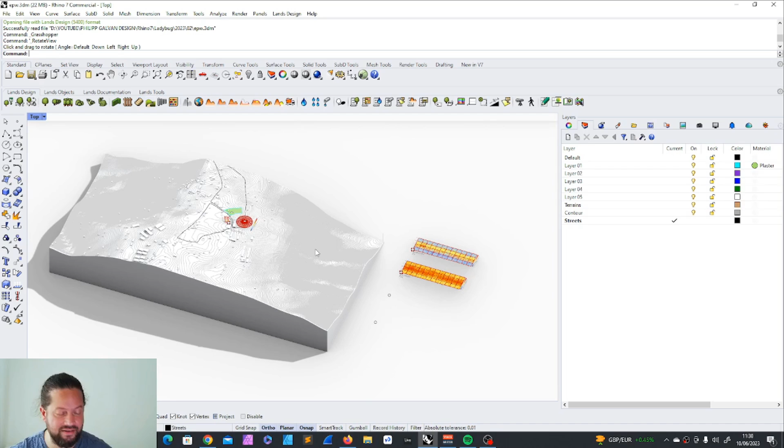If you don't have a problem, then there's a problem. If you try to fix a problem, you automatically have a goal. If you can find the problem, then you automatically have a goal, and that's important to any design you do. If there's no problem, then you haven't done your analysis well, I think.

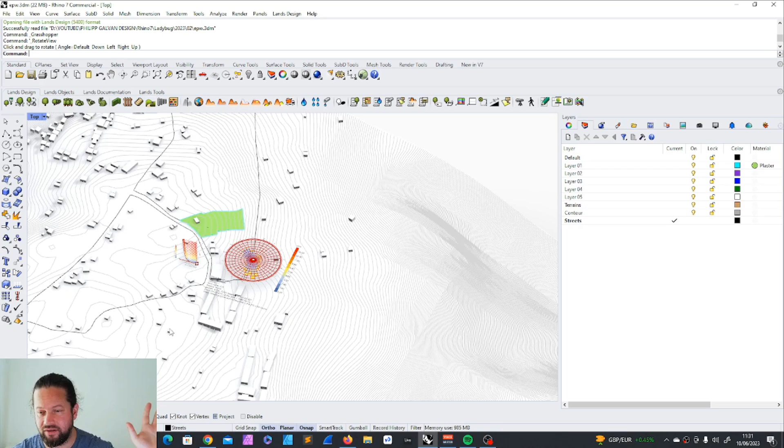If you don't know anything about what we did in the previous videos, please go back in the videos. It's kind of crucial to understand where we are. I'm working on a real project. It's on a slow pace, but I try to really get my head around what's going on inside and what I could contribute in order to work it out. So go back and see what I discussed before, so you understand what it's all about.

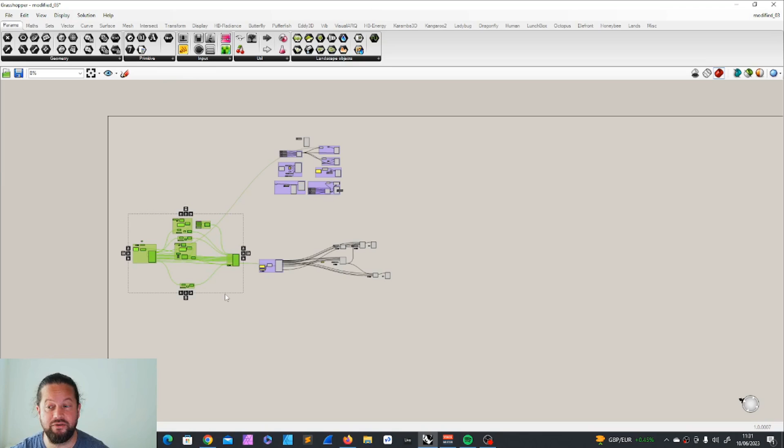In this video, we will have weather data. Maybe I go here into Grasshopper for you to better understand. All right, in Grasshopper, we imported weather data from an online source. Unfortunately, that weather data is not directly at the site where we have our project, so we had to modify the weather data so it fits our project better. It's not ideal, but the purpose is to show you how you could modify your weather data.

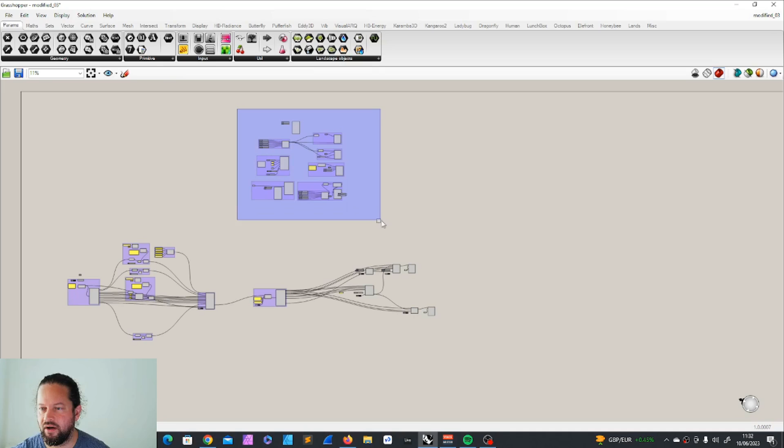So even if you don't want to watch the previous videos on how to modify weather data, you can still use just a generic E+ weather data in order to follow along with these next steps. In the previous videos we also looked into how to import. So if you don't know these first portions, import and analyze data, then I highly recommend you go back in the playlist and watch these videos.

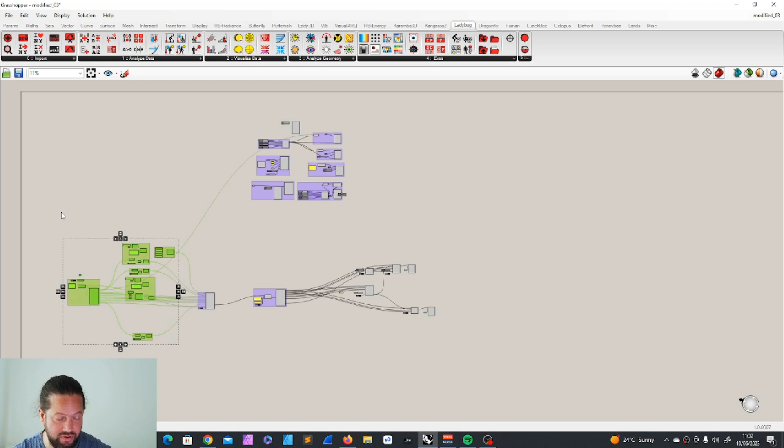Again, this first portion is just us basically trying to manipulate the weather data which came from the airport, from Kigali. The output is just another weather data. So you can use a generic weather data in order to understand the tool. You don't need to follow this whole step. You can plug everything into the import E+ weather data. So this tool here is exactly the same as here. This is just our modified version of the weather data.

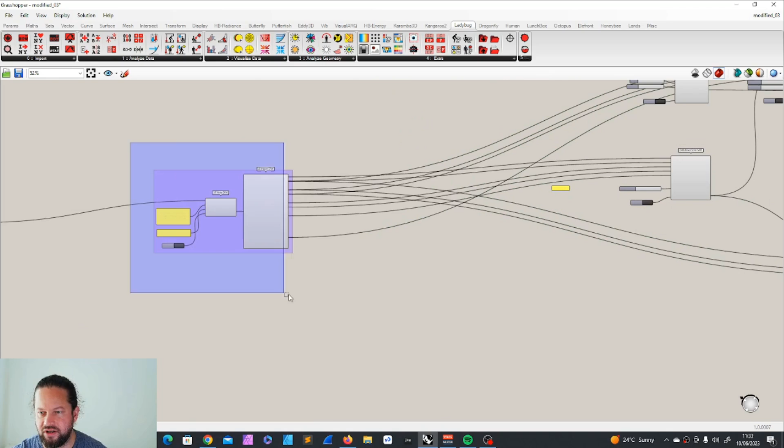And in the last videos, we looked into all kinds of things like how to construct data, how to deconstruct data, how analyze period works, wind speed, degree days, and so on. And then in the last two videos, we looked into the UTCI outdoor comfort and the PET comfort, which are both outdoor-based comfort studies. And it turned out that PET is much more accurate or takes other things into account. So that was very interesting. It also differentiates between male and female. That was very interesting, especially for this project. It will be run by women, and that's why it's very important to get that right, to understand what's going on.

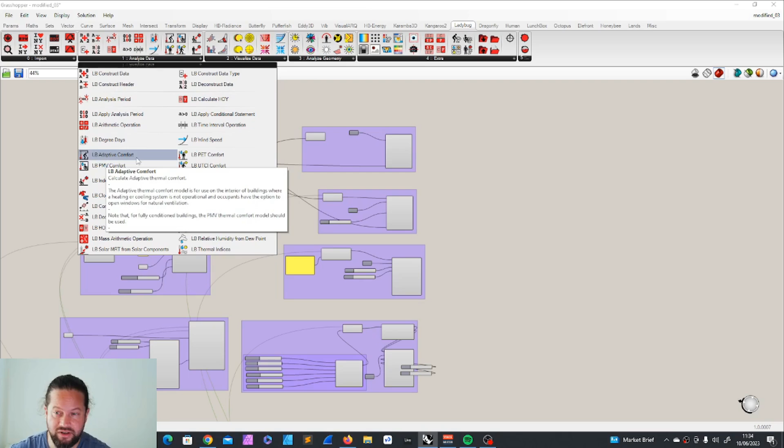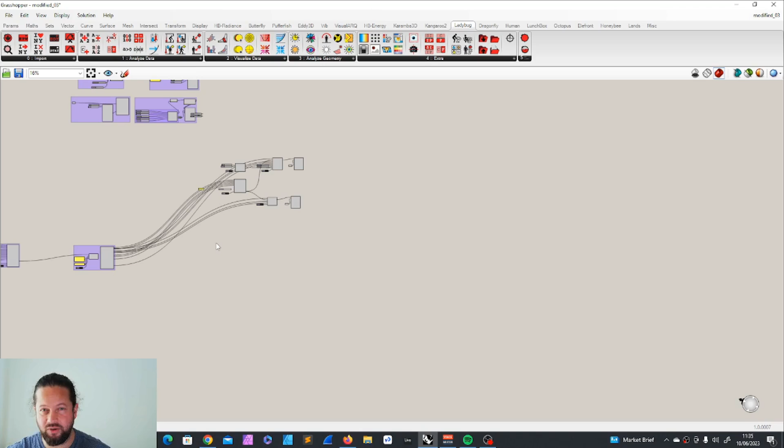So this was outdoor comfort, and now today we look into both these tools, the adaptive comfort and the PMV comfort. They're a bit tricky to apply because it's going to be a mix of generally analyzing the weather data. At the same time, it could be extended quite a lot to where it actually involves the model, but we will not work with a model yet because we don't have a model. So we will just use the data we have at the moment.

Again, this was just us playing with data. This was the transformation of the weather data. This is our weather data now, the transformed weather data. This was the indoor and outdoor comfort. And we plotted these charts showing the different outdoor comfort models.

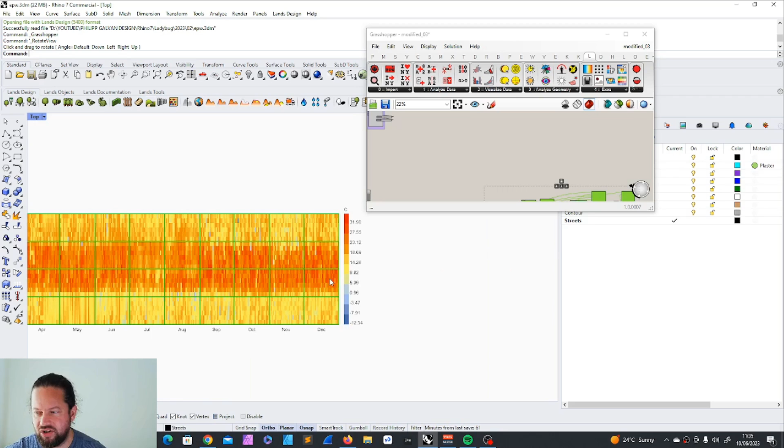The physiological equivalent temperature, which got us a very, very detailed idea on the temperature, on the perceived temperature. And then we had the Universal Thermal Climate Index, which gave us quite a different look, strangely. So it's something I will explore more in future because I got very curious about the physiological equivalent temperature. It seems like it's more refined, more accurate. Okay, nevertheless, indoor comfort. Let's see what we can do.

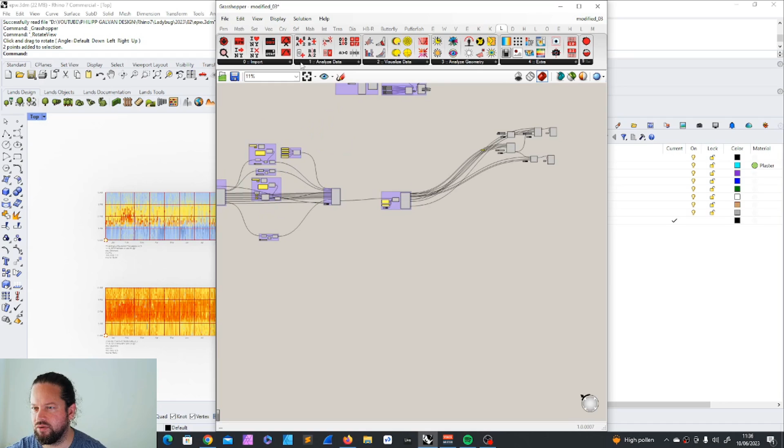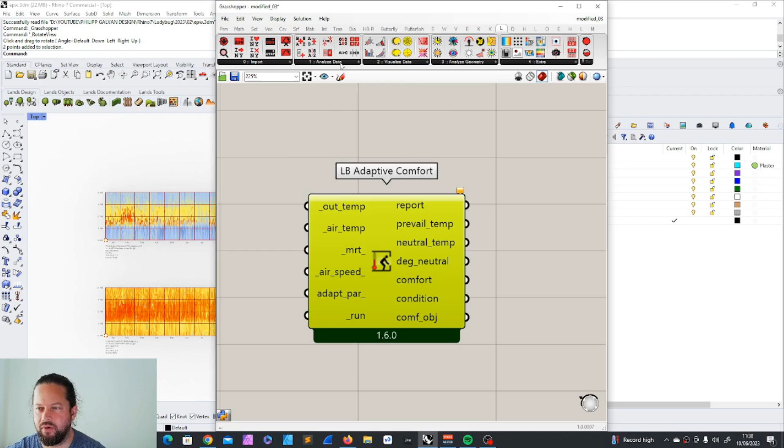Ladybug tools, we are here. We will look into these two. Let's see if we can look at both, or if we need to split up the whole thing again. Ladybug adaptive comfort. This is actually supposed to be the first in the comfort series, but when I tried it the first time, I ran into some problems. All right, just to very quickly summarize, we have two models here. We have the adaptive comfort, and we have the PMV comfort.

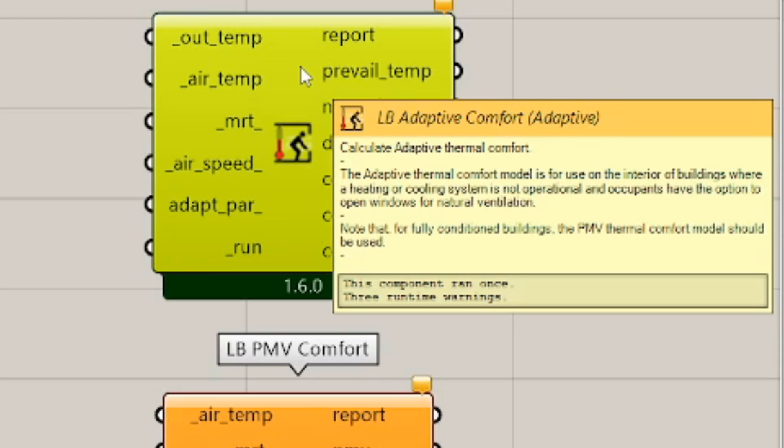Let's open both so we see what the differences are. Maybe we do it just together at the same time because it might help. We have similar inputs, different outputs, different calculation. The adaptive thermal comfort model, as it's defined here, is for use on the interior of buildings where a heating or cooling system is not operational and occupants have the option to open windows for natural ventilation. Note that for fully conditioned buildings, the PMV thermal comfort model should be used.

So this is for buildings which have no heating, no cooling. The PMV model is for buildings which are fully conditioned. As per definition, the PMV is a thermal comfort model for use on the interior of buildings where a heating or cooling system is operational. For naturally ventilated buildings, the adaptive thermal comfort model is recommended, and for outdoor conditions, models such as the Universal Thermal Climate Index UTCI or physiological equivalent temperature are recommended.

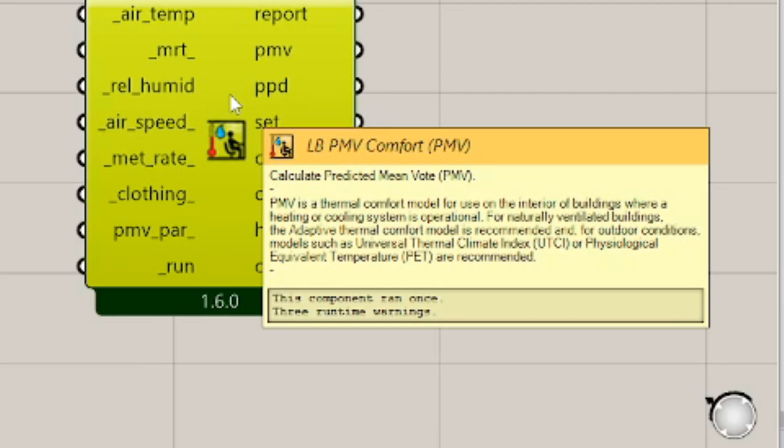So that's what we looked at last time. This is for conditioned buildings. This is for buildings without heating or cooling. We will look at both. All right. So we have the outdoor temperature. The outdoor temperature we know. We have the dry bulb temperature. And because it's indoor, it's all about the air temperature around the occupant.

Now, because we don't know anything about the space yet, we don't know the building, the structure, the materials, we have to make certain assumptions. Let's say we have no heating or cooling in the building. The next best data we have for the air temperature is actually the outdoor temperature itself. Sounds a bit weird, but that's the only thing we have at the moment.

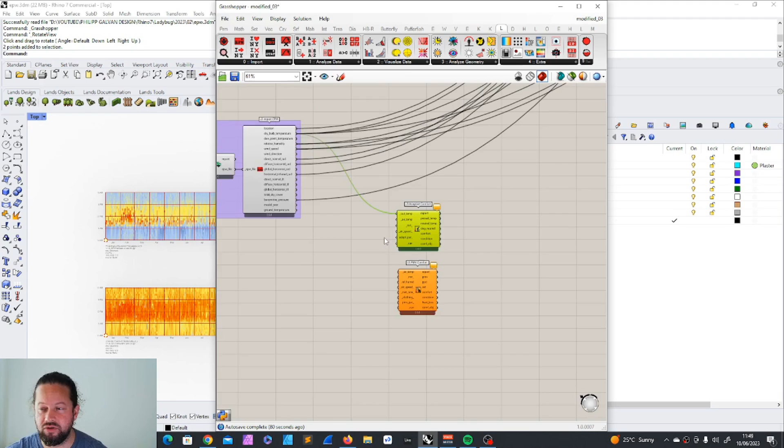But keep in mind that if you research more on how the temperature changes from outdoor to indoor through heat gain, solar radiation, and how the occupants change the temperature, because people working in a space also change the temperature inside, then you can start to make adjustments. For now, just to show you the tool, I will use the same temperature as the outdoor temperature. As a starting point, I think it's reasonable, but again, use it with caution.

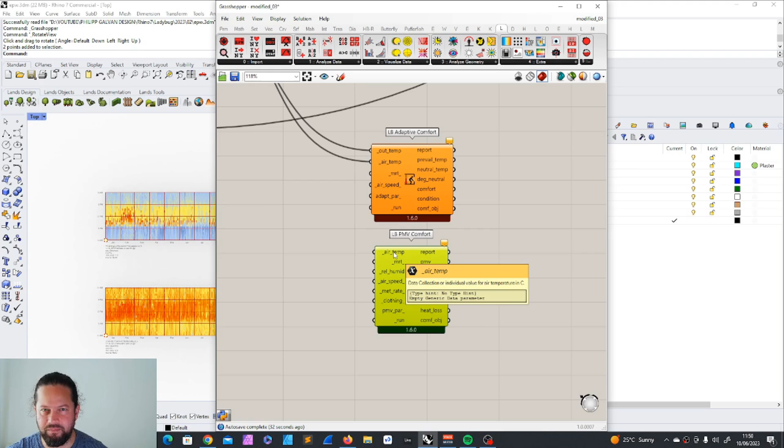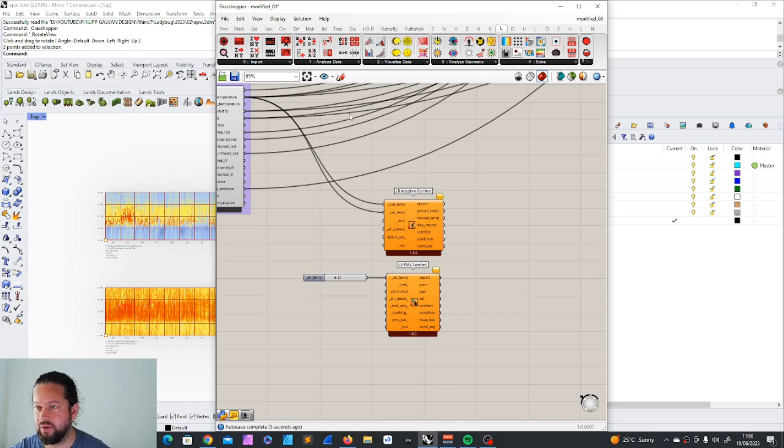And then we have the air temperature for conditioned spaces. We would need to assume that the air conditioning always tries to keep a range between 19 and 23 degrees or something like that. So we just have a slider here and we will provide the air temperature. We also need a run button, Boolean toggle, copy. These are actually the two things we need to add. There's nothing more to add here.

Now we already can check and see the comfort. Again, it's a bit tedious because we don't have the air temperature, but you can play with that. We could also research a bit how a building with certain insulation, shading, self-shading might influence the outdoor temperature so it fits an interior environment.

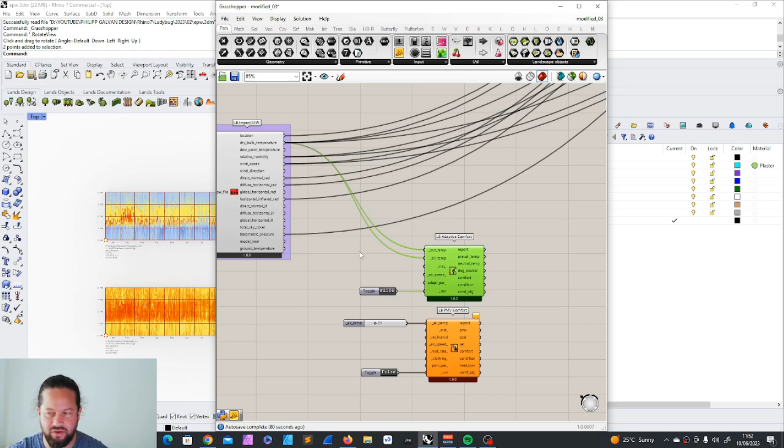So for example, today here it's pretty warm. I can imagine if I go outside in the sunlight, it must be much hotter than here, and in the shade it's probably cooler because I have a breeze. Maybe the temperature might be 3 degrees different. It's tricky because temperatures in winter might be warmer inside and so on. So that's why I will just stay with the outdoor temperature. I assume that people open their windows, so it's always pretty much similar to outdoor. These are the items we need to provide in order to run it. We don't need anything else.

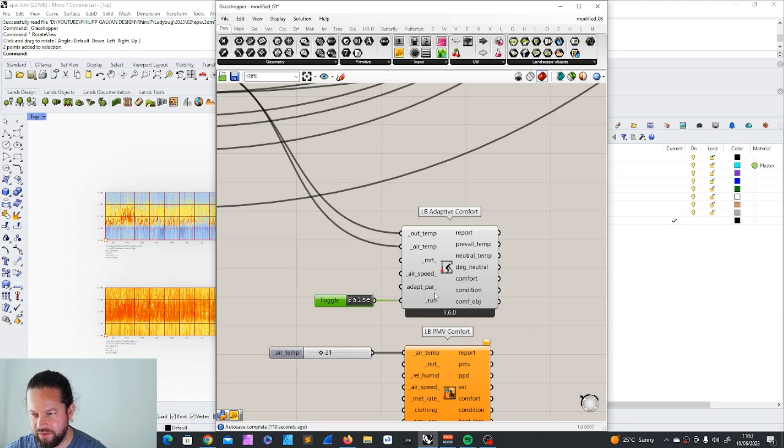However, you have optional inputs. So the mean radiant temperature, what is it? I think we looked at this before. Oh, we had the met rate actually here. Okay, again, outdoor temperature, air temperature. Air temperature represents the temperature inside. Because this is a building without cooling or heating, it's probably very similar to the outdoor temperature. It's tricky to assume, but we don't have any other data at the moment. We have an option called mean radiant temperature, which we will look at in a second. We also have airspeed, and some adaptive parameters.

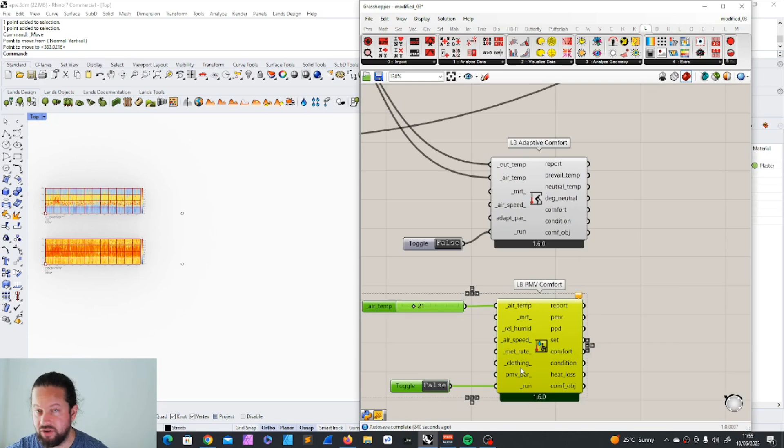And then we look into the PMV comfort. Here it's also a bit different. You also have the mean radiant temperature, relative humidity, airspeed, the met rate. We talked about met rate in the last video. Clothing, PMV parameters. So let's go through step by step. Here again, we don't need anything else to plot something out. What could we look at?

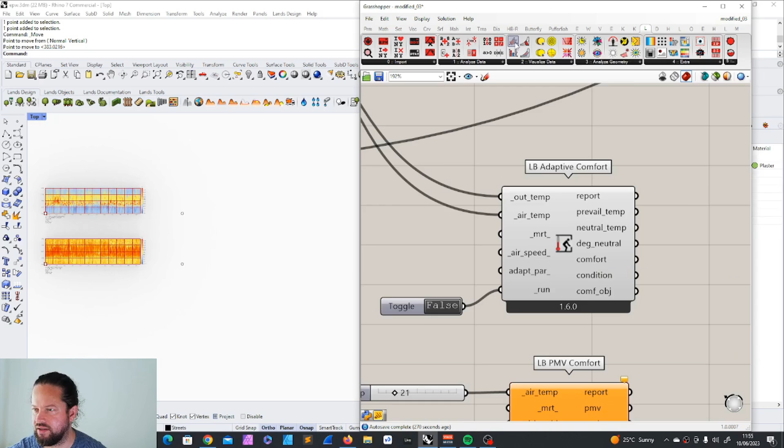We look at if it's comfortable or not. We just grab another chart. We will use a point as a reference where in the plan it should be. You can use this one, and the data for it. And we need to run it first. Let's run it. Okay, true. That goes very quick. And we use the comfort here. Put this in here, data, and it gives us exactly when it's comfortable indoors and when it's not comfortable.

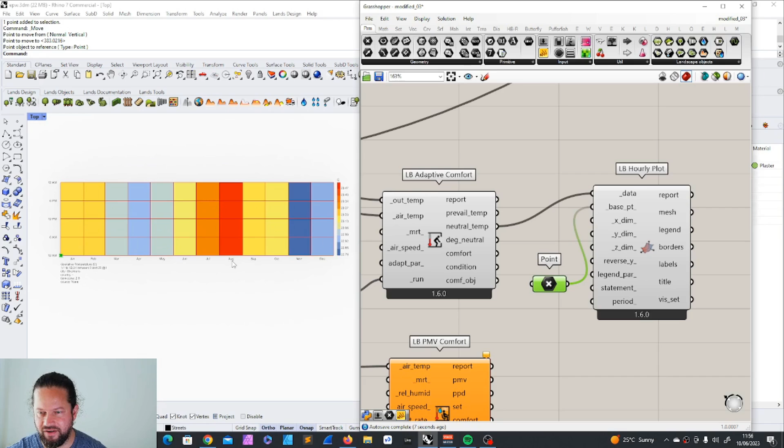Let's maybe look at this here. Interestingly, if I use the neutral temperature, it blocks out which months are comfortable and which daytime in these months. So it just generalizes it quite a lot. It's a bit too zoomed out to look at it. Let's see here. This could be more interesting.

This is the temperatures. These are the difference. This is the difference to the required temperature. That means in order to make it comfortable, it would need to either be less or more. And that's why it says here minus 16. It seems it's too hot. It would need to cool down minus 16. And it would need to heat up. That's how I understand it.

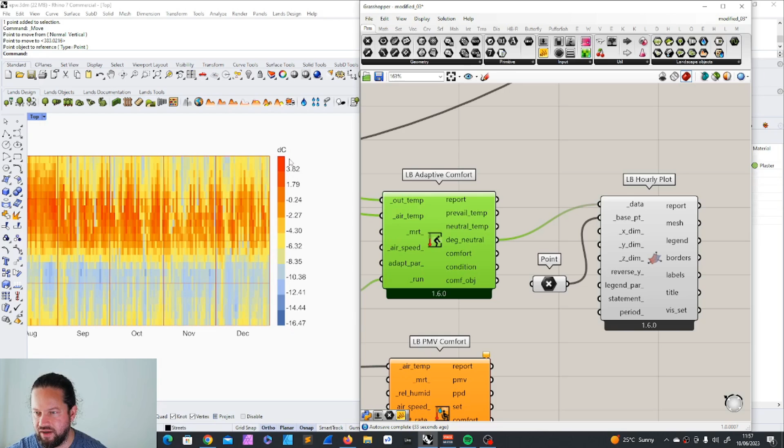Anyway, let's go here. Comfort. So the red one shows now which area, which time of the day throughout the whole year is comfortable and which is not comfortable. So it doesn't really show us more. The mean radiant temperature. Okay, let's check that out.

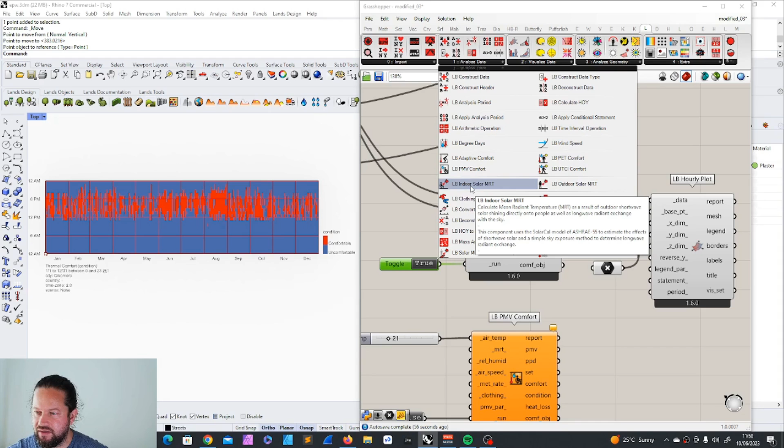We can check it here. Ladybug, we go to Ladybug, analyze data, and mean radiant temperature. We need to use the Ladybug indoor solar mean radiant temperature. Okay, so this is what we use here. I think we did the same. Yes, we used the outdoor solar mean radiant temperature in the previous videos. So you probably already might know how it works. So we can put this here. We will need it for both tools. So let's put this here.

Okay. This again needs the location. It needs a run button. Again, also the long wave mean radiant temperature. Again, it's super tricky. We don't know enough about what's going on. However, it's good to know the tool because we can gather information like this through Honeybee much later in the process. Anyway, let's continue. Long wave mean radiant temperature.

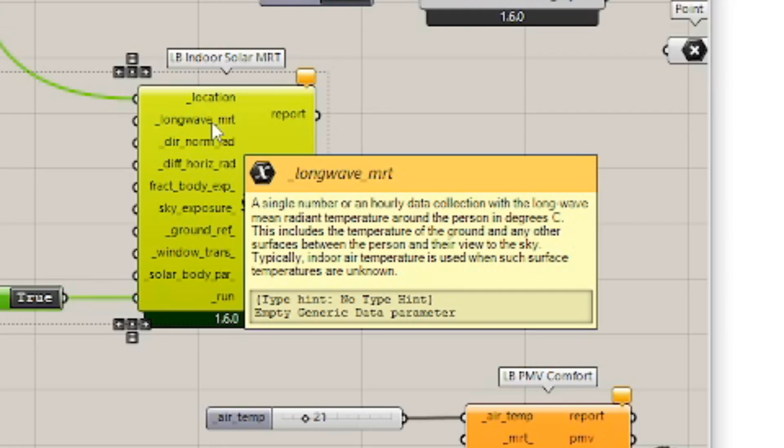A single number or an hourly data collection with the long wave mean radiant temperature around the person in degrees. This includes the temperature of the ground and any other surface between the person and their view to the sky. Typically, indoor temperature is used when such a surface temperature is unknown. So, okay, we don't have the indoor temperature, so let's just use the dry bulb temperature. Then it's asked for the direct normal radiation. Let's use the outdoor also here. The diffuse horizontal radiation. The fraction body exposure.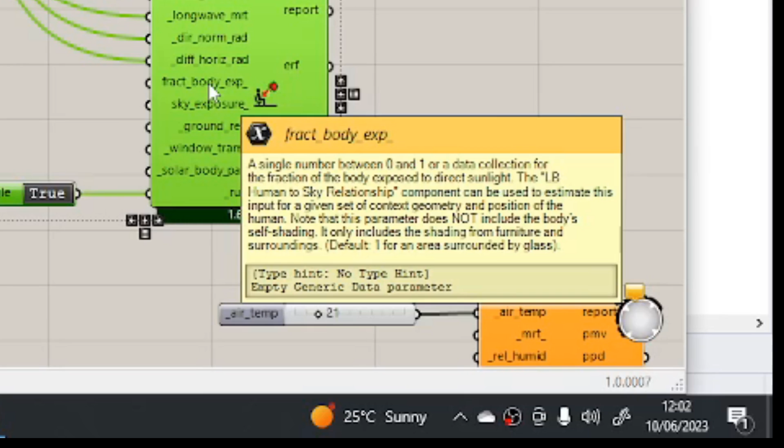A single number between 0 and 1 or a data collection for the fraction of the body exposed to direct sunlight. Because we're indoor and we make it simple, we could use of course a model, but we don't have a model yet. So we will just assume we don't have any direct exposure to the sun. That's what I assume, okay? The component can be used to estimate this input for a given set of context geometry and position of the human. Note that this parameter does not include the body's self-shading. It only includes the shading from furniture and surroundings.

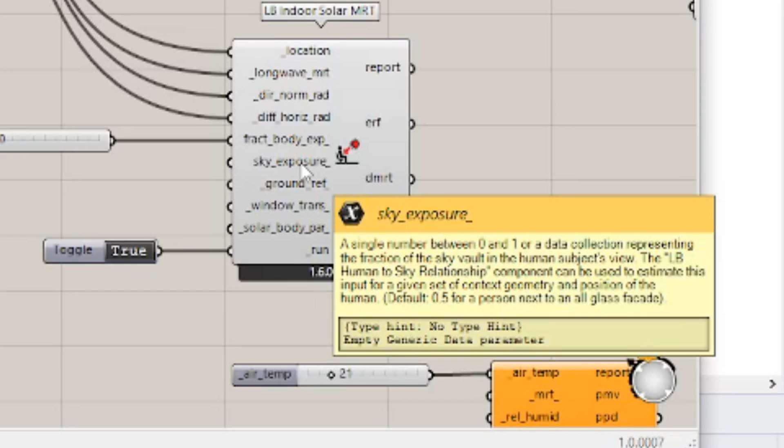Sky exposure, a single number between 0 and 1, or a data collection representing the fraction of the sky vault in the human subject's view. The Ladybug human to sky relationship component can be used to estimate this input for a given set of context. So again, we don't have a context. We could maybe just estimate how much percentage you see of the sky through your window, for example.

Let's say I put this to 1, maybe 30%, 20%, maybe, and here also, I need to go onto 1 as a maximum. So a single number between 0 and 1, so I just estimate. I just say, okay, we don't have direct sunlight, or maybe just in the morning, let's say a few hours. So I go for 0.1 maybe here. And then sky exposure, maybe 0.2 as well. So that's my sky exposure percentage, 10%, 20%.

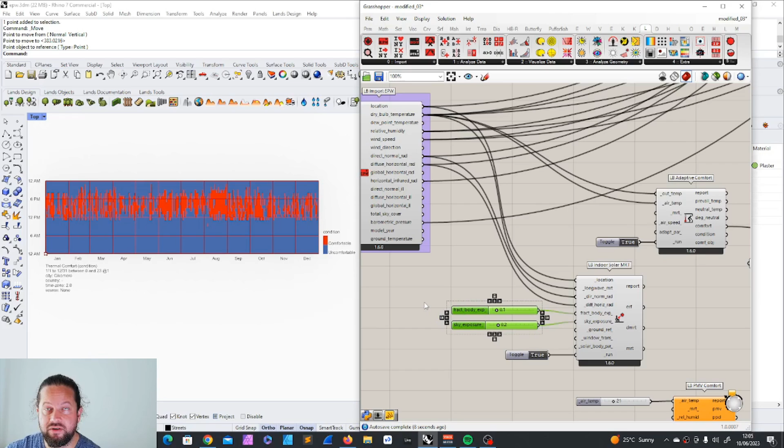And of course you can play with it. That already gives you a way to play with thinking about your building, how big the windows are, and so on. Ground reflectance. Okay, let's check this. A single number between 0 and 1, or data collection that represents the reflectance of the floor.

Default is 0.25, which is the characteristic for concrete. So let's use that. I could imagine that concrete is relevant here. Probably simple. Okay, we need more digits. 0.25. Okay, and we have window transmittance.

A data collection or a number between 0 and 1 that represents the broadband solar transmittance of windows through which the sun is coming. Such values tend to be slightly less than the SHGC value, might be as low as 0.2 and could be as high as 0.85 for a single pane of glass. Default is 0.4, assuming a double pane window with relatively mild low-E coating.

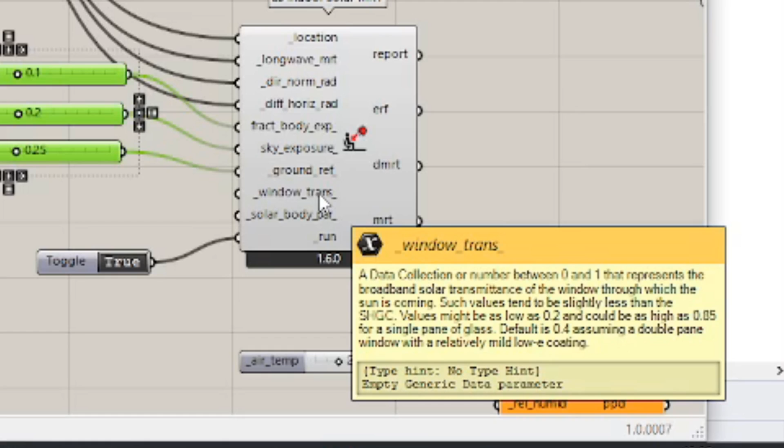I don't know what they're using over there, but I assume the transmittance might be quite high. They probably won't use double glazing, so let's go with a high number for now. And you can research for your project what typical stuff people are using, and then you can see what happens if you change that, or it gives you an idea if you want to use double glazing, single glazing, and so on.

The solar body parameters. So this is another tool we need to input, and you can find this here, I think, in Ladybug solar body parameters. Yeah, so we can put this in here. We actually moved quite away from this stuff, but we can already provide something. So if we now put this in here, let's see if this changes. Mean radiant temperature, that goes in here. That changed a bit, so we now have a bit more time which is comfortable, but it seems like it's not very comfortable in the night, probably too cold.

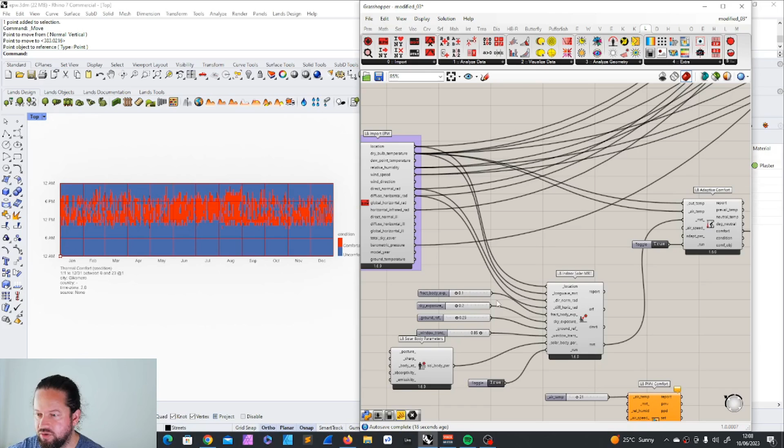And now we have other options here. We can change the posture. Standing, seated, supine. Let's say we are seated, people sitting down. The next input here is about the angle of the sunlight. So if you're sitting in a way that the sun is shining into your face, that has an impact, of course. We just leave it as it is.

The body azimuth, a number between 0 and 360, representing the direction that the human is facing in degrees. It's interesting because these both deal with the sunlight, the solar horizontal angle relative to the front of the person. We'll just leave that because we assume that you are that clever and you arrange your interiors so the sunlight is not constantly shining into your face.

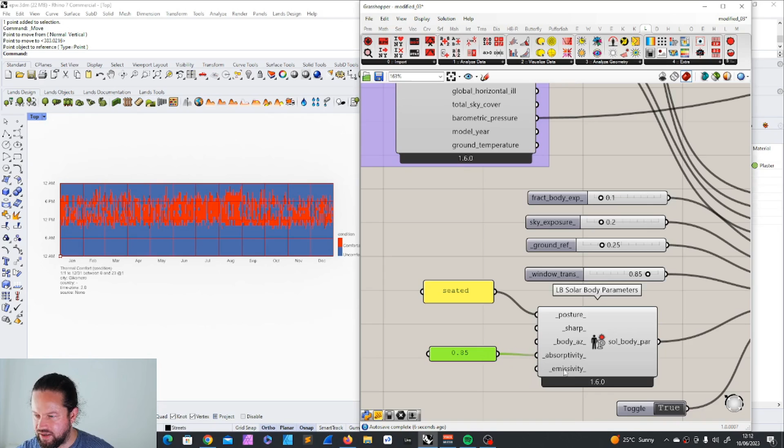And then also the emissivity, how much the body... Oh, I put this in the wrong one. I'm not sure if this actually changed anything. Oh yeah, it actually changes a bit. And here it says the default emissivity is 0.95, which is almost always the case, except in rare simulations of wearing metallic clothing. Okay, so that's emissivity. Pretty much provided input here everywhere. You could now, of course, play with this.

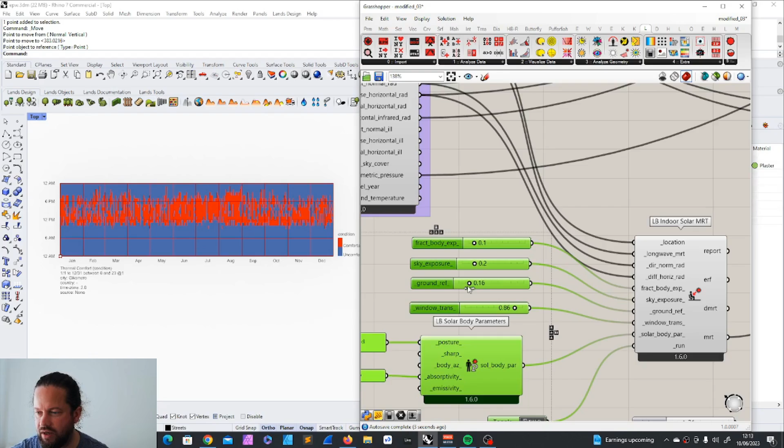What if I have more sun exposure? That changes things. Actually has a big impact. Sorry, my light is gone. Doesn't matter. The sky exposure has also quite an impact. Ground reflectance, you can see there's quite a difference. And window transmittance. It's just better you have more transmittance to allow for more heat coming in. But let's look at the other components here.

So we have airspeed. This is not the airspeed outside. This is the airspeed around the person. And the default is 0.1 meter per second. So I would say let's not change that. But of course you can always play with it and see what's changing. 0.1 meter per second is the airspeed. Just changes very slightly. Oh no, I took this thing away here. This was not a good idea.

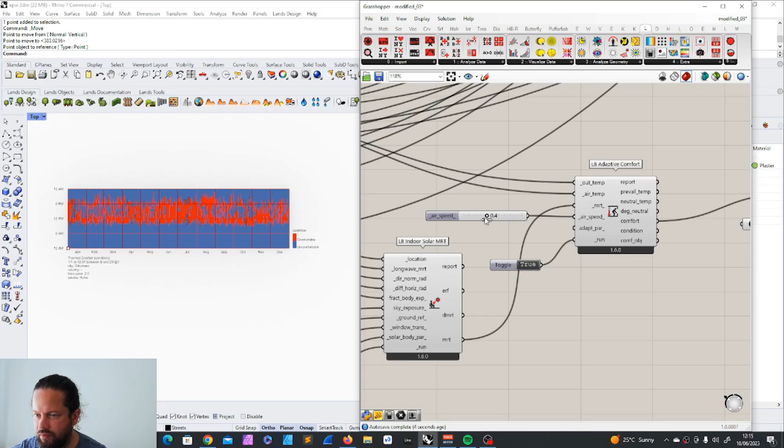So now you're thinking, oh, why did it become more here? So if I have ventilation or a fan, then actually I can improve, at least within this area, between 6 p.m. and 12 p.m. I can improve the temperature because it's about cooling it down.

These gaps in between actually show me that this blue area between the red is uncomfortable because it's too warm. And whatever is outside is uncomfortable because it's too cold. And you can see here in the red areas, it's actually 6 degrees too hot to be comfortable. And then in the blue areas, it's, let's say, 16 degrees too cold.

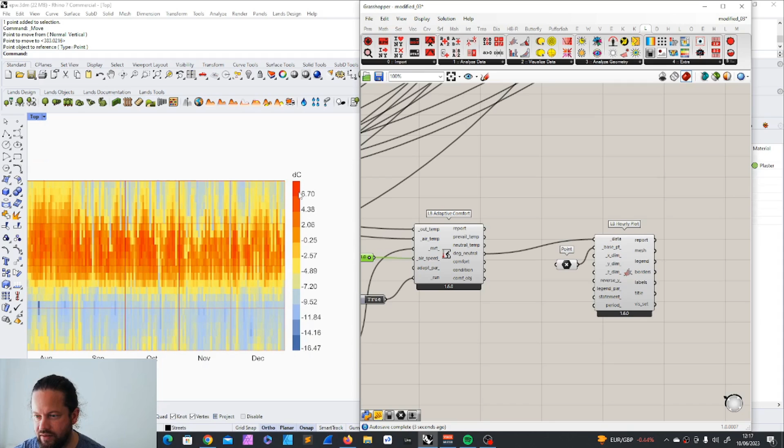It's not minus 16 degrees, it's 16 degrees too cold to be comfortable. So, for example, here in August. So if we increase the airspeed, no, it's just minimal change really. You can't really see it on the chart. Hasn't really changed here because there's still areas with 6.7. But yeah, I hope you understand what I'm saying here.

If I have a fan, maybe I can make this even higher. 5 meters per second. Let's go here again. Yeah, from a certain degree it's not really changing that much anymore. I also add here this. In any case, that's how you could start playing with it.

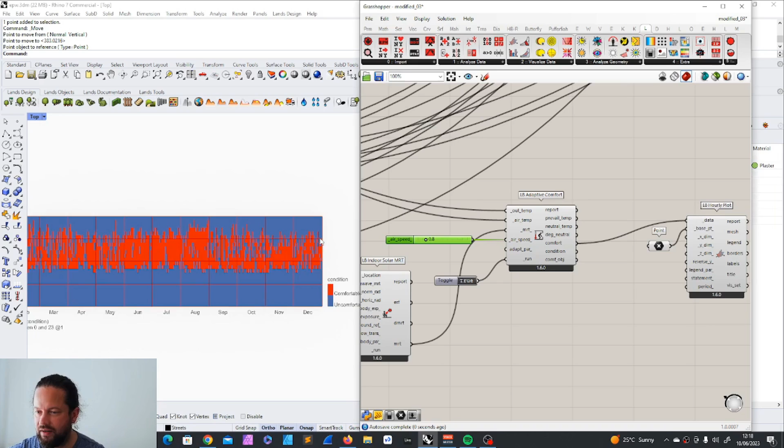And there is another input here, it's called adaptive parameters. Let's check this out. Adaptive comfort parameters. I have this one. Let's move this a bit away here. What is this all about? Alright. I will not go super into detail because now it's getting to the finer grain, let's say. Here it says the ASHRAE or EN15251. What is that? Okay, let's check what the tool does.

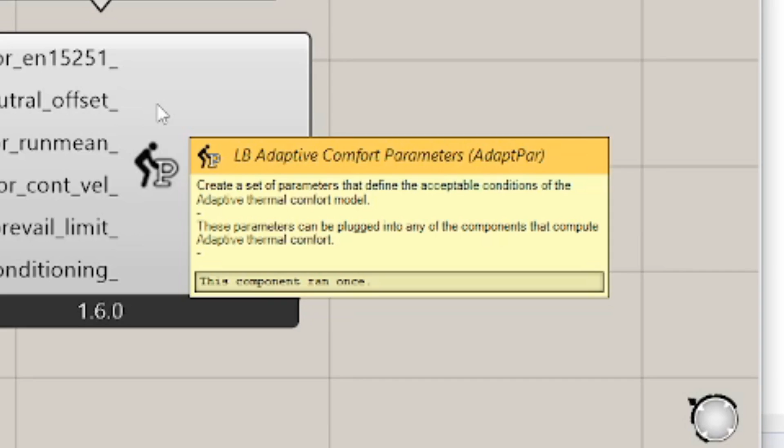Create a set of parameters that define the acceptable conditions of the adaptive thermal comfort model. These parameters can be plugged into any of the components that compute adaptive thermal comfort. And then here you can basically select between ASHRAE or the EN15251, which are both building standard models, which basically define the defaults for these sets below. The ASHRAE is an American standard. The EN is a European standard. They both have their pros and cons.

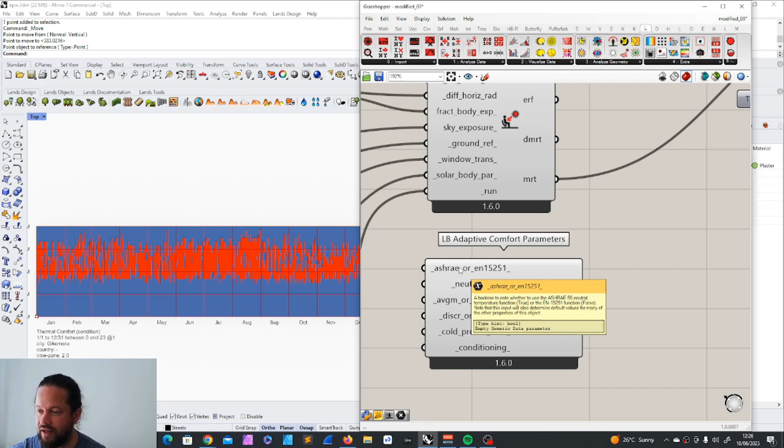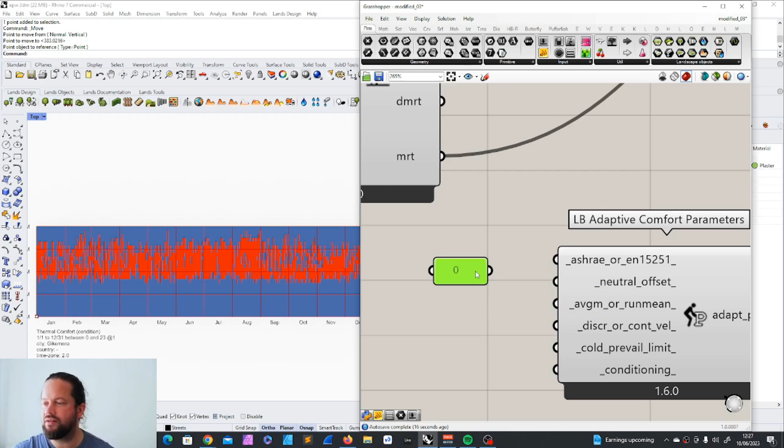In that case, we could just select here true or false, just to test it out. I will not go into detail. You need to read about it yourself. I think when you're very clear about your building structure, materials and so on, then you might go into this a bit more and start reading about it. I would just try true and false. We can just put the toggle here. It's either true or false.

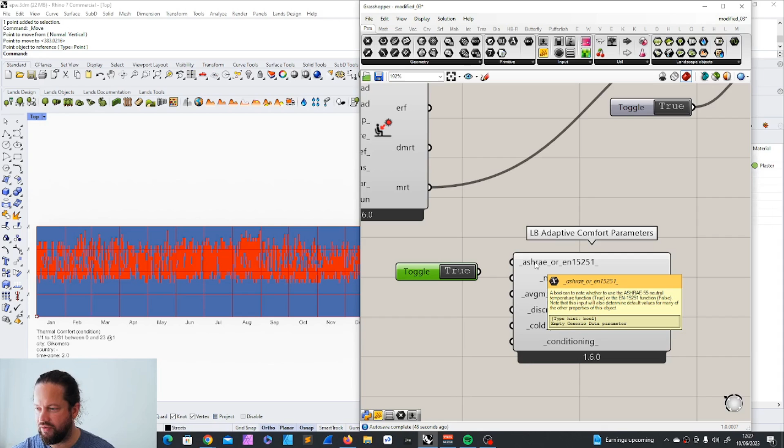If we want to use the ASHRAE 55 neutral temperature function, that's true. And if we want to use the EN15251 function, then we use false. And by defining what we use, it also changes the defaults in here. So I will not go through that. You can read through it, it's always good to read. I did it myself, so I roughly understand what's going on.

So for example, the first one, neutral offset. The number of degrees Celsius from the neutral temperature where the input operative temperature is considered acceptable. The default is 2.5 degrees when the neutral temperature function is ASHRAE55 and 3 when the neutral temperature function is EN 15251. So you may want to use the set neutral offset from PPD or the set neutral offsets from the comfort class method on this object to set these values using PPD from the ASHRAE55 standards or comfort classes from the EN 15251 standard respectively.

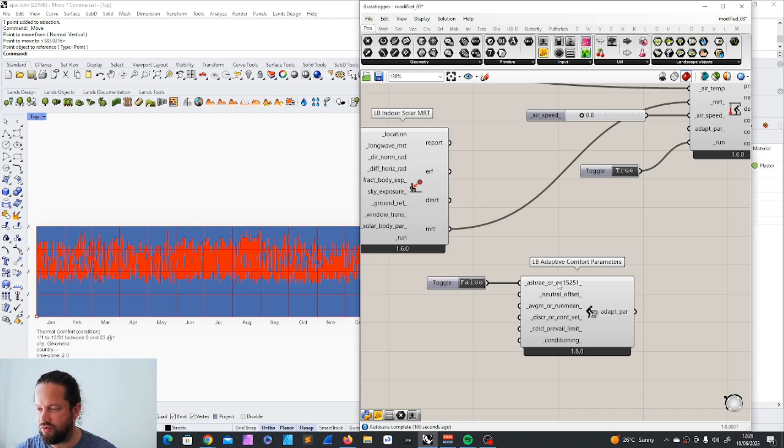So again, if you go deeper and deeper into indoor, outdoor thermal comfort modeling, then you will learn more about this, and then you will also understand what's going on. Here you can also decide if it's conditioned or not conditioned, how the outdoor prevailing temperature affects the indoors and so on. I will just keep it on false. I want to try to use the EN 15251 model, and I will just put this in here and see if there's any change. Yeah, changes a bit.

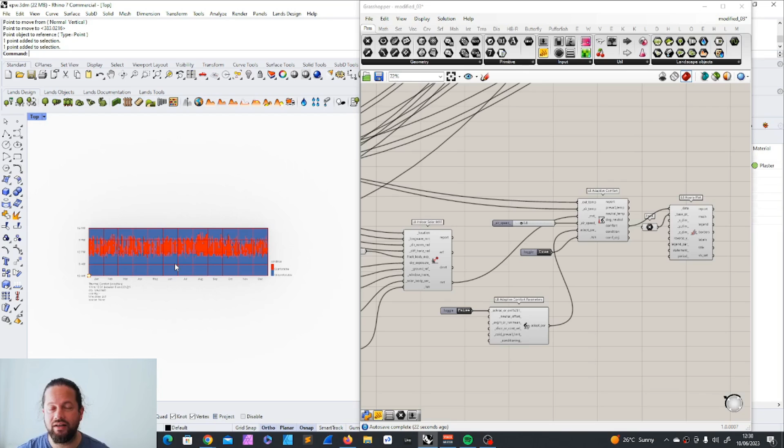It's very clear what it says. What it says to me is that the indoor is not comfortable during the night. So I can imagine that the right insulation might help to improve that without adding heating to the building. So it's actually more too cool than too hot. Interestingly. All right, guys. I can see we are already over the time. As you see, it's not that easy to really decide what's the right use, how we can measure it.

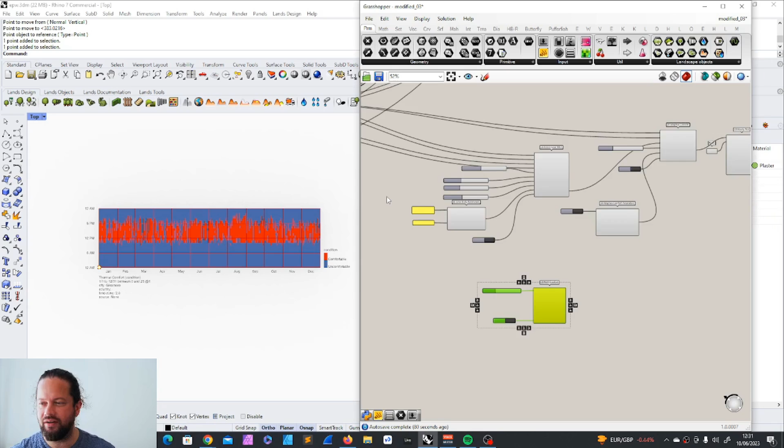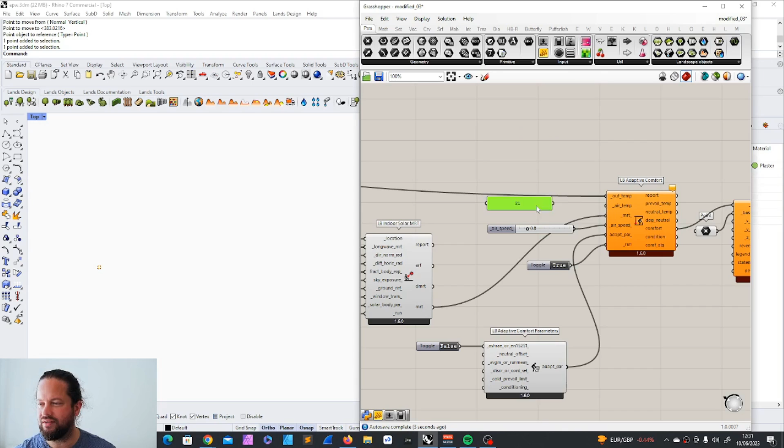I just want to test one more thing. So imagine I can get my indoor temperature right. What happens then? So instead of using the outdoor temperature here, let's disconnect. It doesn't work, of course. Now let's say through insulation we get the indoor temperature right. It's always 21 degrees. What happens then? Interestingly, it is not much different. So let's stay here, and we can revisit that when we know more about the building, then we can play with these values.

Okay, so this was the first part of indoor thermal comfort, and we will look at the PMV comfort in a bit. See you in the next video.